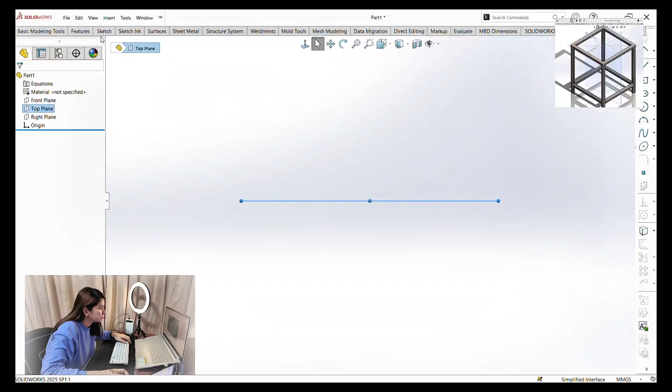Today, I'm excited to show you my latest project, the Feeder Hopper Conveyor. I'll walk you through all the parts, explain the specifications, and show how the system works in handling materials efficiently. So let's get started with part 1, the base frame.

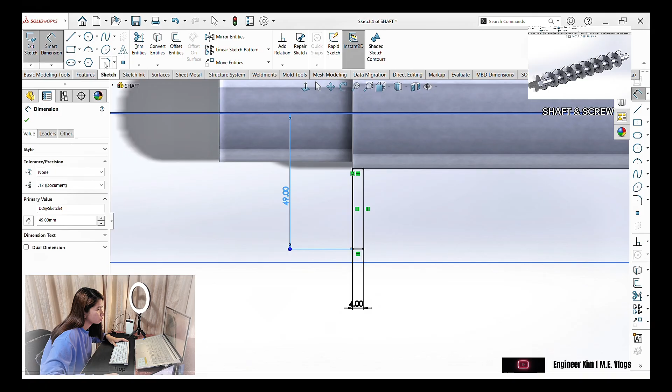Okay, so that's all for today. We've completed a detailed walkthrough of our feeder hopper conveyor design.